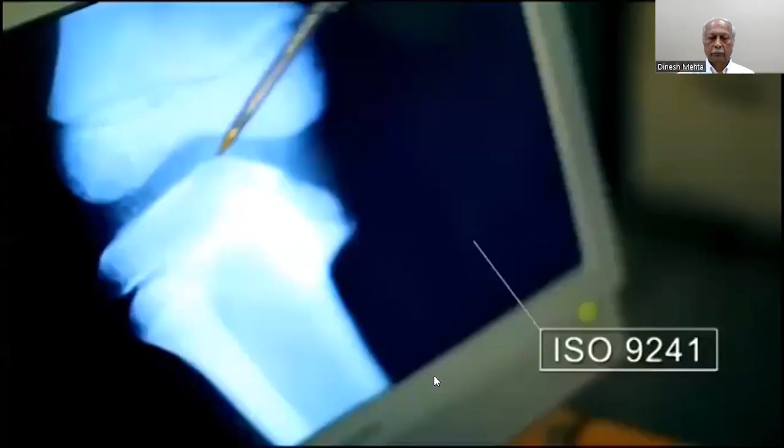We live in an amazing world, full of incredible opportunities and endless possibilities. But it can also be a complex and overwhelming place. When things don't work as they should, it often means that standards are absent. But when ISO standards are applied, life is just so much richer. ISO standards help to make the world a safer, cleaner, and more efficient place. From food safety to computers, from healthcare to new technologies. There are many challenges facing our environment, economy, and society. ISO can make a positive difference to all our lives, utilizing a wealth of international experience and wisdom.

In today's ever-changing world, ISO standards help create growth, open up global markets, and make trade fairer, including for developing countries. ISO standards can help tackle global challenges like climate change, road safety, energy, and social responsibility. ISO standards touch almost everything we do, keeping us connected and entertained, making us more productive, more creative, sharing ideas, promoting innovation, and keeping us safe and healthy.

ISO is the world's largest developer of voluntary international standards, with over 18,000 standards for nearly every aspect of technology and business. For over 60 years, a network of standards bodies in 163 countries, working in partnership around the world and right here at home. ISO builds confidence for today, for tomorrow, and for the future.

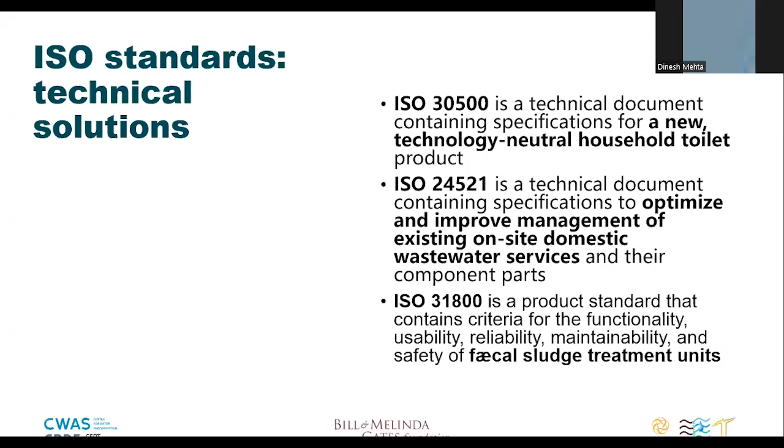In general, ISO standards are technical solutions, and the 3 standards that are of interest to this webinar series, ISO 30500, 24521, and 31800, all have different purposes within the broader sanitation system and sector. To summarize briefly, ISO 30500 contains specifications for a household toilet product - it's a product standard containing specifications for this specific household toilet product. ISO 24521 contains specifications in a management system standard to optimize and improve existing on-site domestic wastewater services and their component parts, so this standard is for utilities and sanitation service providers to help optimize their processes. And ISO 31800 is again a product standard, but it contains the criteria and specifications for fecal sludge treatment units, at the community scale. So those are the very high level distinctions between the standards.

I'm not going to show a video now, but I did want to mention that there are several videos on ANSI's website, sanitation.ansi.org. It includes an explanation of sanitation standards that builds on the video played from ISO's website in the beginning, and also includes some videos on the specific standards, with easy to understand language about what the standards are. If these slides are made available after the fact, this will include a direct link.

Since the publication of ISO 30500 and 31800, ANSI has been working with the other partners involved and users and practitioners to encourage the effective use of these standards so they can be widely used in the sector. The key point we have been emphasizing is that looking at these standards together can help optimize existing services in a country while also encouraging the development of new technology. With 24521 focusing on existing services and optimizing those, and 30500 being a standard for an innovative product, if a country is at the early stages or any stage in reviewing the standards it has adopted and in place for sanitation services, these two together are not in conflict, but really work together to help bring the sanitation sector forward and encourage clean sanitation.

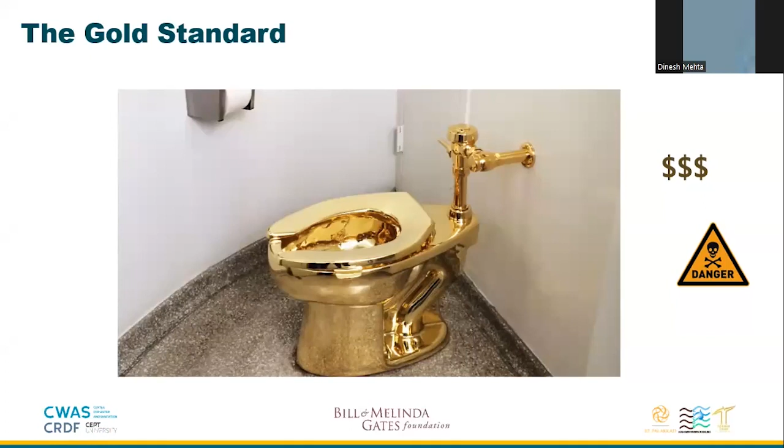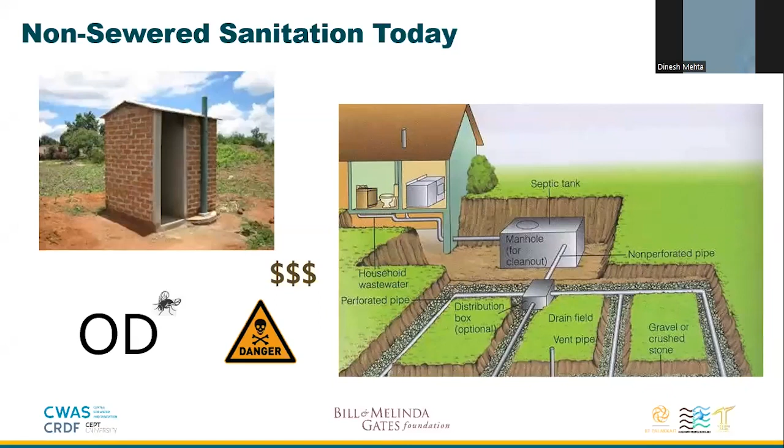So non-sewer sanitation today - these are just some examples. You could have a simple pit latrine. You could have septic systems, typically with a drain field, so biological degradation treatment and then drain field. But this requires a lot of money, a lot of effort, and a lot of land to do this type of drainage. So oftentimes septic tanks in many countries are just holding tanks that need to be pumped out, but oftentimes just overflow into the environment. And then of course there's open defecation, which we all recognize is not a humane solution. All of these, whether they seem cheap at the beginning or at the end, all have costs and impact to the environment and to human health. So these are elements that need to be addressed, and that's the idea behind the standard.

So a quick, yeah thank you, next slide. So this is just - I think everyone on the call recognizes the sanitation service chain, whether it's sewered or whether it's non-sewered fecal sludge management. So we'll overlay how different standards play into this, using this service chain, particularly for non-sewer sanitation.

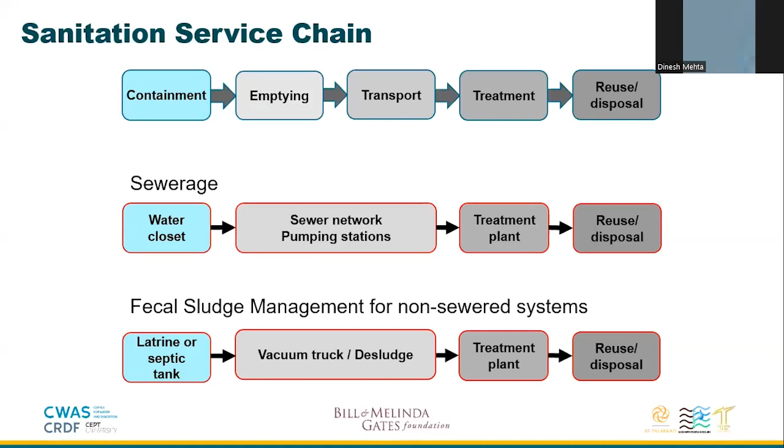So next slide. Leslie had mentioned several different standards. So ISO 24521 and its family of standards relates to guidelines on how to manage in a way that is beneficial to the service provider, but also to the customers of the fecal sludge management supply chain, service chain.

And so ISO 24521 has great examples and guidelines for how to properly document the processes, as well as how to actually more efficiently run such a business. And at the end of ISO 24521, there's actually even examples of existing non-sewer sanitation treatment systems.

And then ISO 31800. So ISO 24521 covers the entire service chain; ISO 31800 is a specific product standard that covers, at the community scale, the fecal sludge treatment units. So this is a case where the containment has occurred, the extraction, desludging, and transportation to a site for proper treatment.

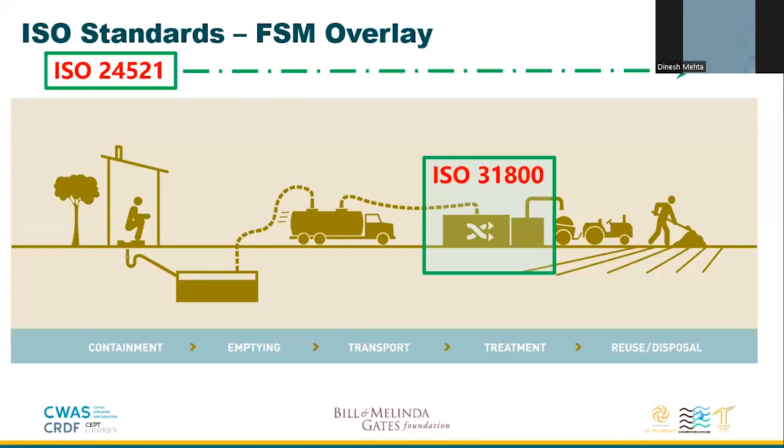And when we talk about treatment, we're talking about where the human enteric pathogens, the germs that cause such horrendous impact to human health: diarrhea, a lot of other diseases, oftentimes death. In fact, I understand that there's hundreds of thousands of individuals that die from preventable diseases because of the fecal-oral transmission of human waste. So that's the summary of ISO 31800. And again, these will be covered in more detail.

So ISO 30500, which I'll concentrate on at this point, really is a product standard that takes the fecal sludge management chain and collapses it all into one product. So basically, it is an aspirational, typically flush toilet that accepts, contains, and fully treats, all in that same unit. And the key is that this system needs to be attractive to the user, aspirational,

and also kill all the pathogens, and also address the environmental pollutants in order to make sure that these compliant systems do everything that sewer sanitation does, from the flush toilet all the way to the conveyance, the treatment, and the discharge, all safely. Now it's a big hairy dream, but the reality is that these products are actually available at the community scale and soon to be available at the household scale.

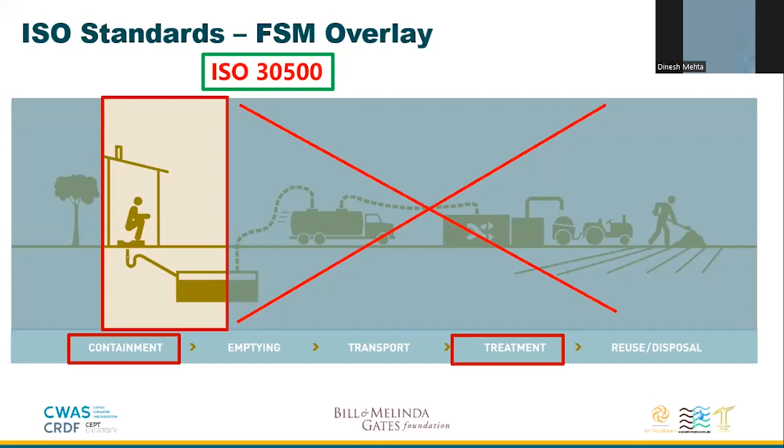And the key will be to drive down the cost so that they become ubiquitous, so that anyone, even the poor, whether in developing countries or developed countries, can reasonably afford to purchase and use these toilet and treatment systems. So let's go into a little bit more detail on ISO 30500. It defines the design, performance, and test requirements of these on-site toilet and treatment systems. It is technology neutral, but it does have to kill all the pathogens and reduce the human environmental pollutants.

And the next elements are things that a user could easily see or sense: odor, noise, easy to clean, not seeing the feces and urine of the prior user. Those are things that are easily evaluated by a user, but this requires the developers and manufacturers of these toilets to actually design this in. So these are prefabricated household or community scale toilets and integrated treatment systems that treat for human health and safety: pathogens, pollutants, emissions, usability, every aspect.

Now, you can see when the liquid that comes out of the system is dirty, but it can oftentimes be clear and yet contain a lot of pathogens or other pollutants. So there are methods to test to ensure that these systems are in fact pathogen-free and safe for discharge into the environment.

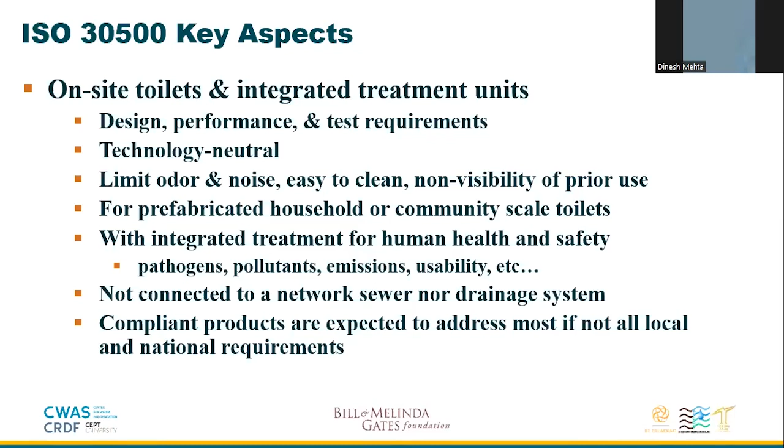But in the end, the compliant products that are tested to the requirements of ISO 30500 are also expected to address most, if not all, local and national regulations. So the idea is that ISO 30500 compliant systems will need very little or no modification or testing in order to be used in any country throughout the world. So, next slide.

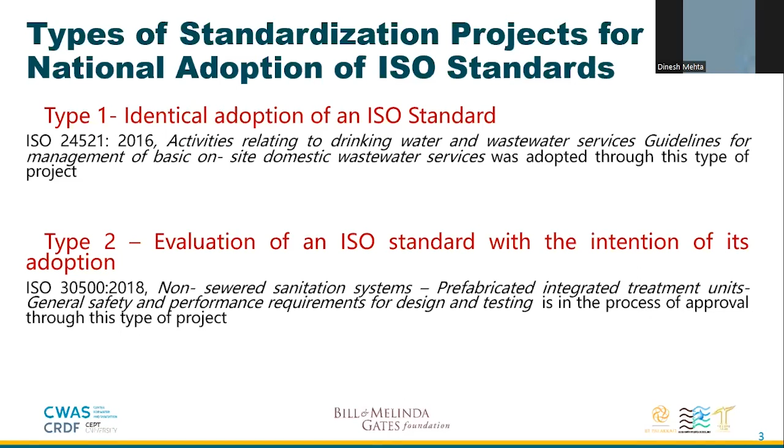But now we came to know that, as per ISO's strategy, after these 5 years it is going to be revised. So let us see what we can do further for this standard. But it is adopted by this standard committee. This is almost the final stage.

So our key achievement is national adoption of the ISO 24521 guidelines, and national adoption of 30500 is almost done. I just mentioned here ongoing. Let us think what to do: forward it to the National Standard Council, or wait for a new version. This is to be discussed separately with the ISO PC committee, as our people are also in a working group. We have an expert team from our country.

They are going to join the meeting in October in Brazil, I think. They will tell us how to proceed. Is it good to have an NS Nepal standard as it is, or do we have to wait for it? Let's see. So I just want to show you some pictures of our stakeholder meetings.

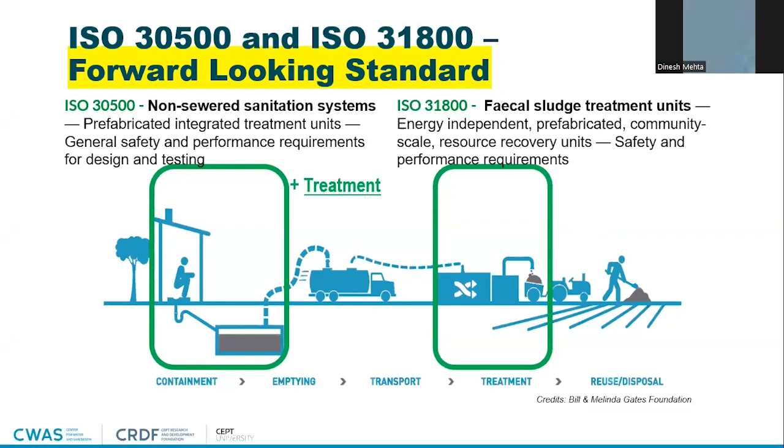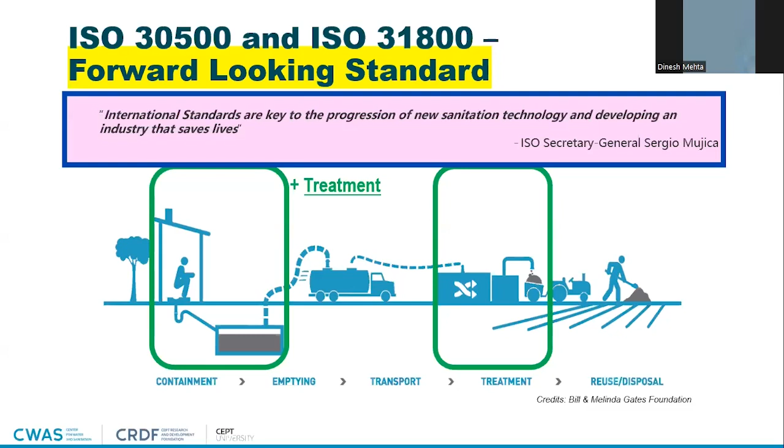Thank you. International standards are key to the progression of new sanitation technology and developing an industry to save lives. This was a statement made by the ISO Secretary General Sergio Mujica. And I think he said that because for the longest time, we had no other options except for a flush toilet or a pit latrine. So the last few years, what the foundation and the community have been doing is really to pave the path for an industry that helps to save lives.

Next slide, please. Okay, so today, as mentioned earlier by a couple of speakers, it's not a deep dive into the two standards. I'm giving an overview of ISO 30500 and 31800 from a technical perspective, and this is also not the intended space to share the lessons learned. I think that will be done in the deep dive.

So essentially in ISO 30500, it's categorized into a system if you only have the back end only. What that means is your product treats the solid and liquid, but you can buy any off-the-shelf front end like the toilet bowl or the squat pan, where your technology's beauty, the magic, comes in from the back end only. So with 30500, that's how it's been categorized.

Or if you're a single unit that comprises the front end and back end, that's all the testing requirements you need. That means you declare that, hey, my unit has a front end and it's attached to my back end, so I certify that as one product. And 30500 requirements are broken down into basically 3 categories: document checks, control lab testing, and field testing.

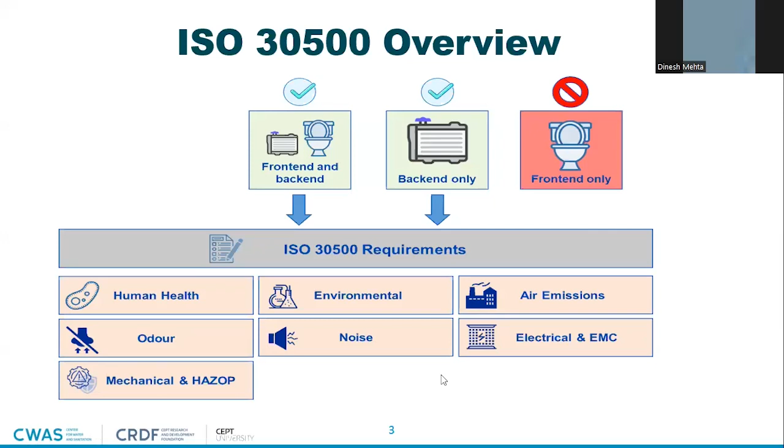Next slide, please. So I want to share a short video available on the TÜV SÜD website to give an overview of 30500. Could you help me play the video, please? It's about 3 minutes long, featuring manufacturers of different types of sanitation technologies.

The standard can be broken down into 3 main parts: document check, controlled lab testing, and field verification of performance.

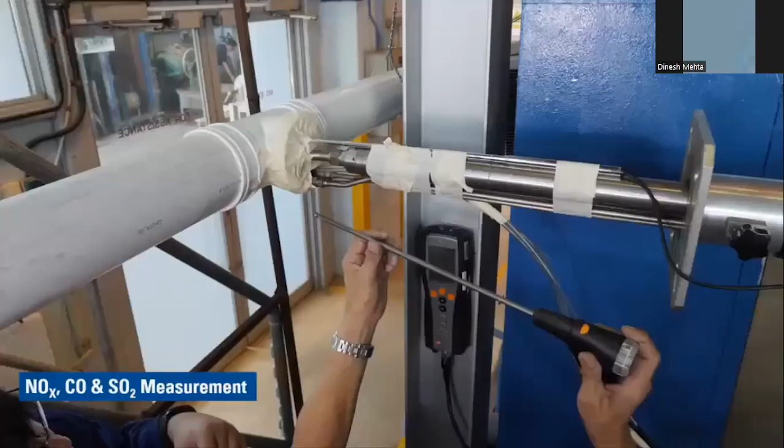The first component to meet certification of the standard is to comply with the required document checks. The second portion of ISO 30500 is controlled lab testing.

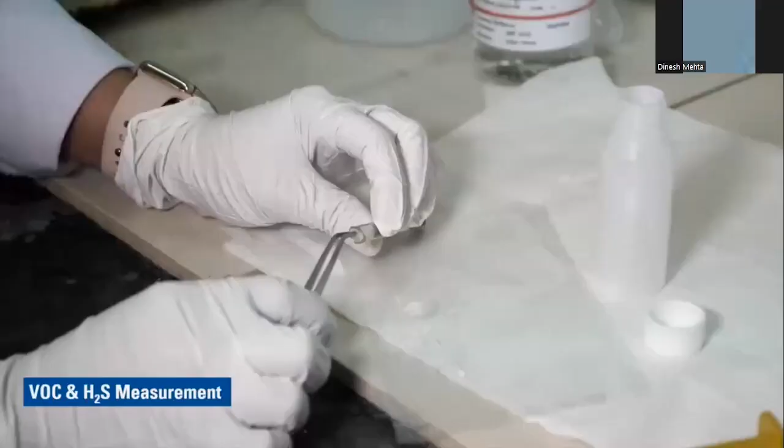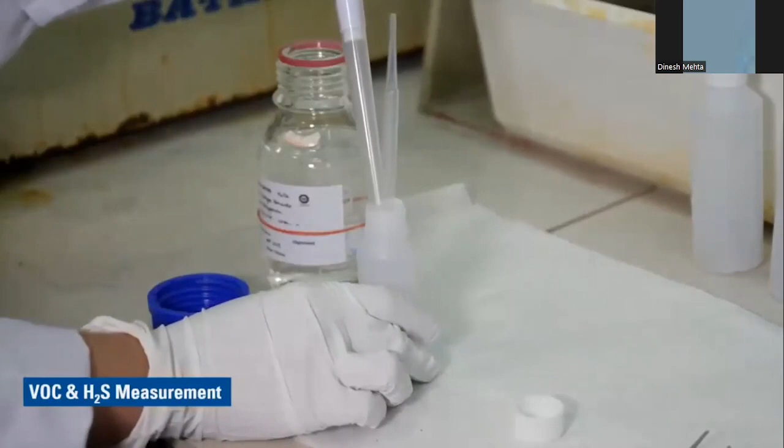The lab testing involves a test sequence of minimum 32 days with a prescribed loading pattern. The aim of this segment is to ensure the reliability of the unit tested under a strict set of conditions.

Last but not least, field testing is required to ensure the system is robust in real-world conditions. The following segment shows a recent testing in Durban, South Africa. For this round of field testing, we'll be doing a series of tests for human health and environmental parameters on the EcoSan eSync unit.

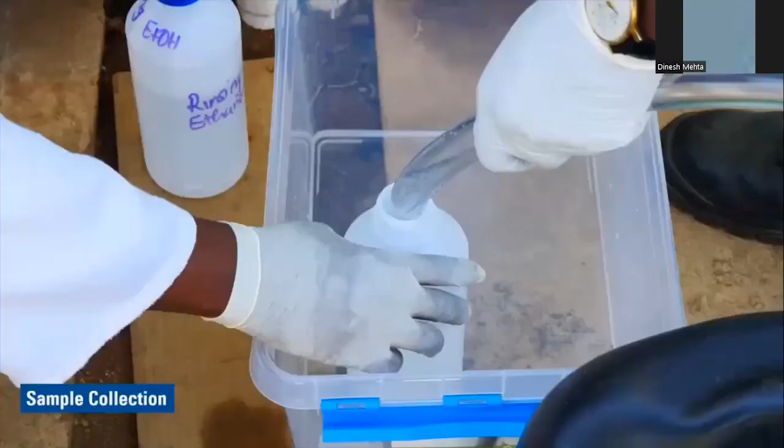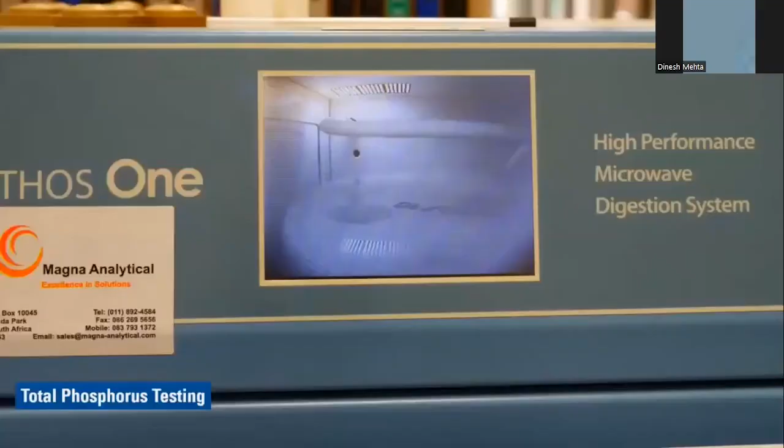Depending on the type of system, these tests are to be carried out weekly over a course of up to 5 months.

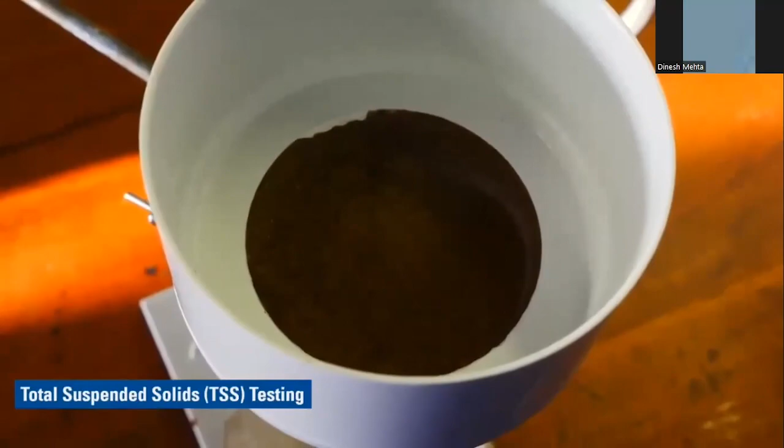This validation work has given TÜV invaluable knowledge on testing the new standard, and for manufacturers, an opportunity to test for certification readiness.

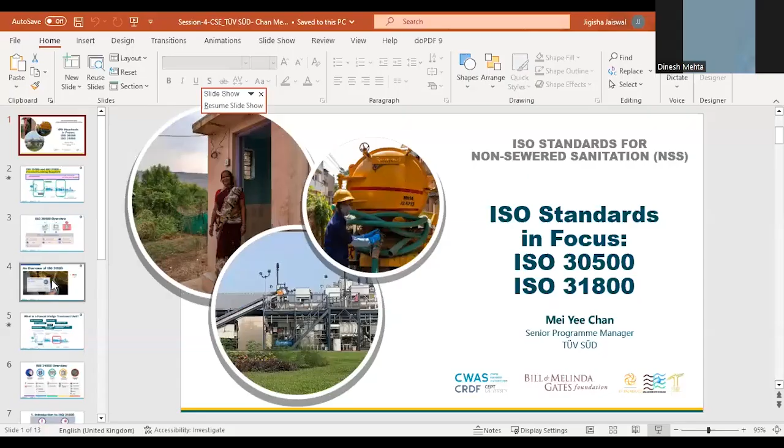Thank you for the video. So TÜV has conducted testing over a period of 5-6 years at different locations, primarily in South Africa and China, on different technology types. We have accumulated quite a number of field testing experience and knowledge, and these are some of the things we'll be sharing in the next in-depth webinar series to come. So with that, I have completed the overview of ISO 30500.

The next topic I want to move to is ISO 31800. It's a fecal sludge treatment unit, FSTU we call it for short. Click, please.

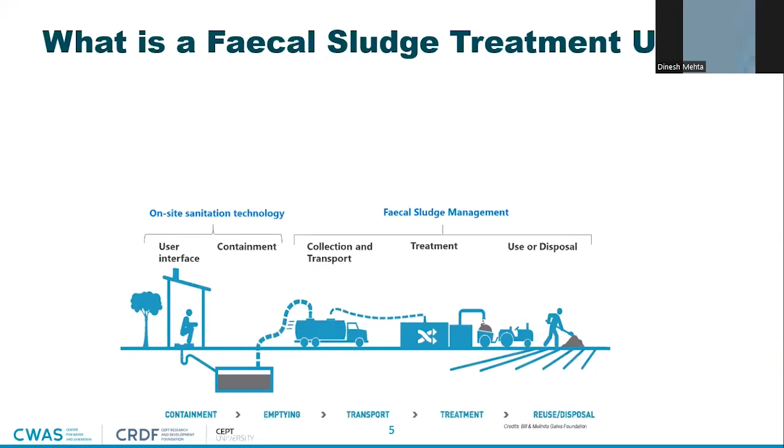Another click, thank you. As Sun had mentioned earlier, this FSTU has some criteria to be qualified. The key thing is it has to be energy independent when the unit is running at steady state, and it also has to recover resources from the input.

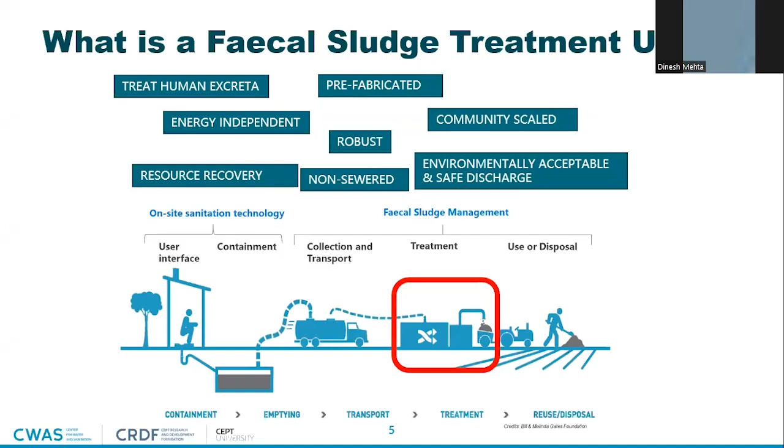And the real objective is to make sure there is a safe place for the vacuum trucks to dispose of, to discharge the fecal sludge into a fecal sludge treatment unit for processing.

And the technical requirements for 31800 include performance testing, safety testing, operability, and maintainability. Some of the product literature we require from manufacturers is the operation and maintenance of the fecal sludge treatment unit.

And as I mentioned earlier, energy independence is one of the key aspects of FSTU. And last but not least, performance testing for human health, environment, air emission, odor, and noise are all part of the requirements of the standard. Next, please.

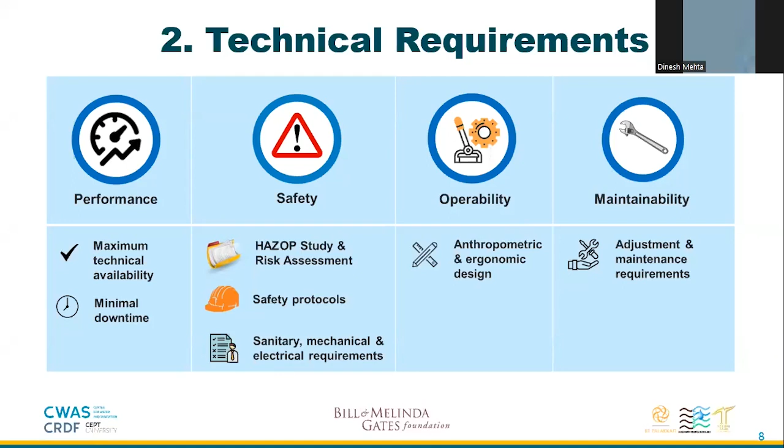And also the operability of the unit and how easily it can be maintained is also a key success implementation criteria. Next slide, please.

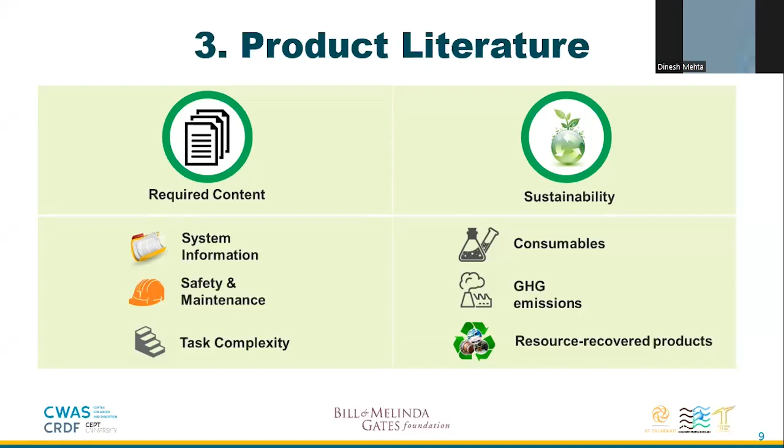So in the standard, we also talk about sustainability, because one of the key requirements is it has to recover resources. So we look at how much CO2 emission the FSTU produces, and what resources are recovered from this machine, from this unit. Next slide, please.

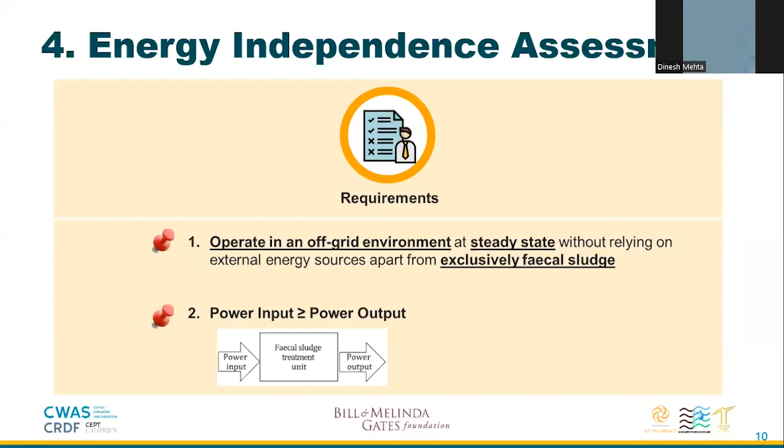The energy independence assessment, as I mentioned earlier, it has to operate in an off-grid environment at a steady state without relying on external energy sources, apart from the input of fecal sludge. So what that means is, while you're starting up the machine, you are allowed to plug into a power source, but once it starts to operate, it has to use the energy generated from the unit itself to power the whole operation.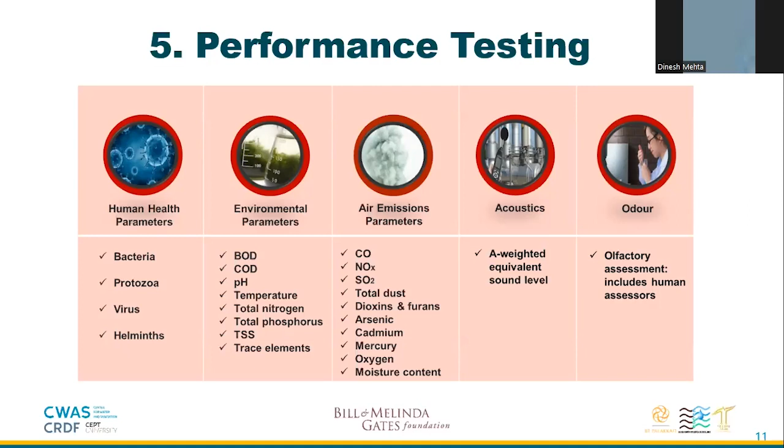For air emission parameters, it's a lot stricter than the household toilet unit. So we look at dioxins and furans, arsenic, mercury, and moisture content. For acoustic, because it's such a big unit, we also have stricter requirements for noise. We also have odor testing, which is also found in ISO 30500.